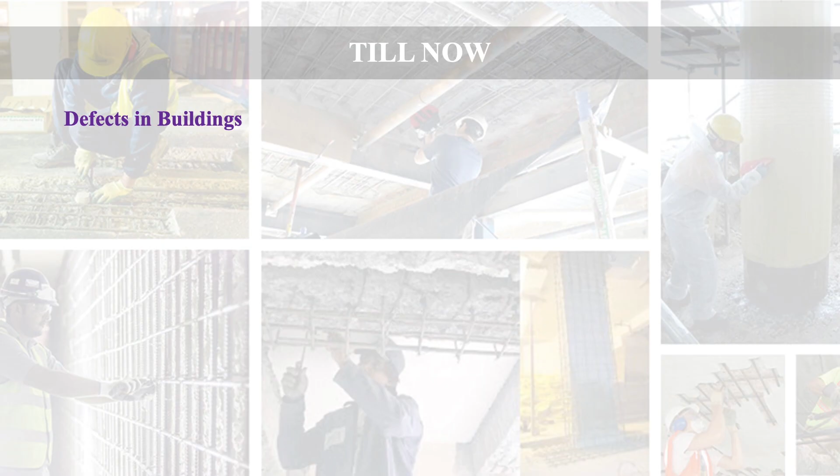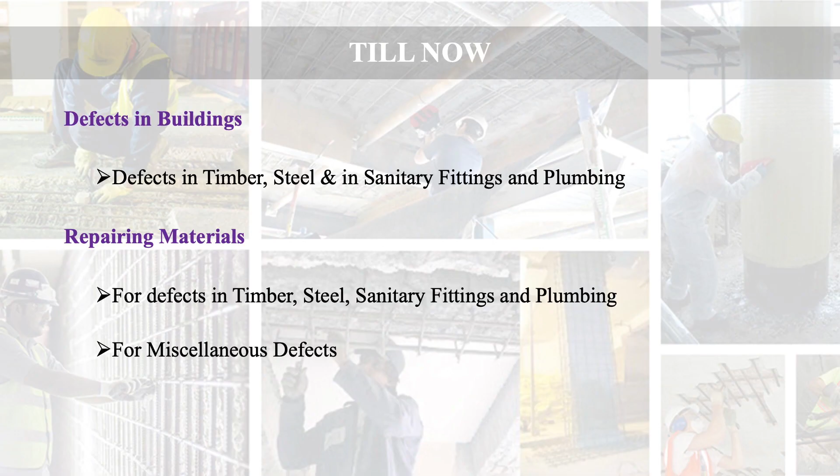Today we are going to discuss about the cracks in concrete beams. As you remember, we have discussed till now about defects in buildings, in which we discussed about defects in timber, in steel, and also defects in sanitary fittings and plumbing. Then later on we moved to repairing materials for defects in timber, for defects in steel, for defects in sanitary fittings and plumbing, and repairing materials for miscellaneous defects. Then we discussed about repair and preventive maintenance techniques, in which we discussed about repairing of floors, then strengthening of stone and masonry structures, and lastly we discussed about water and damp proofing.

Now we are moving to a new topic, which is strengthening of cracked beams. Today we will be discussing about the causes for defects in beam and structures, particularly concrete structures, the types of cracks in concrete beams, and repair of concrete structures.

Objectives of this lecture are as follows: at the end of this module you should be able to explain the factors contributing to the failure of beams, and also you should be able to describe various types of failure.

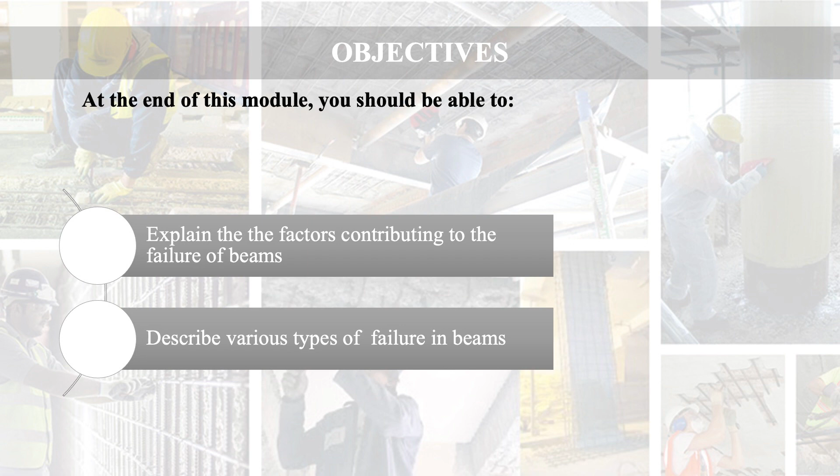Now let's begin with the essential conditions for continued serviceability of a structure. That if a building has to be serviceable, what should be its characteristics? Means if a building has to be serviceable through its life, then what should be the characteristics or conditions there?

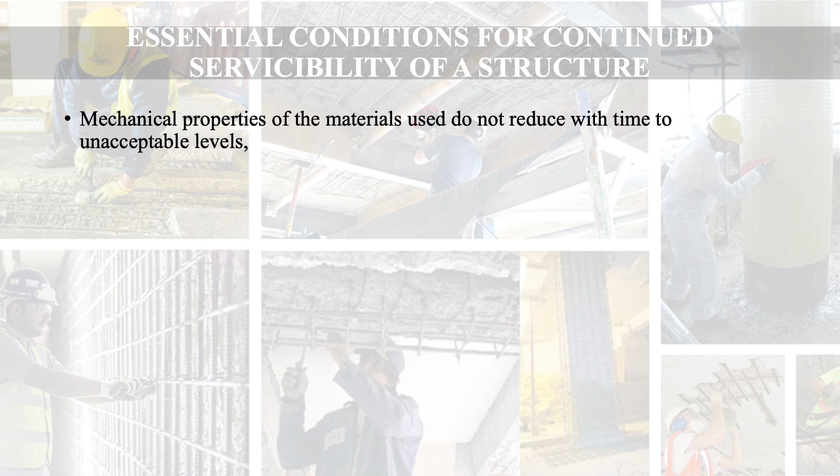First, the mechanical properties of the materials used do not reduce with time to unacceptable levels. We know that there is certainly a reduction in the properties of the material, but that should be within limits. So it should not be up to an unacceptable level.

Second, there is no reduction in size of a structural member, either by erosion of concrete, by spalling, or corrosion. Due to erosion, spalling, or corrosion, the size of the structural member should not reduce; it should remain the same if the structure has to be serviceable.

Next, there is no significant loss of section of reinforcing steel in concrete. Due to corrosion, the section of the steel should not reduce, meaning the size of the reinforcing steel should not reduce.

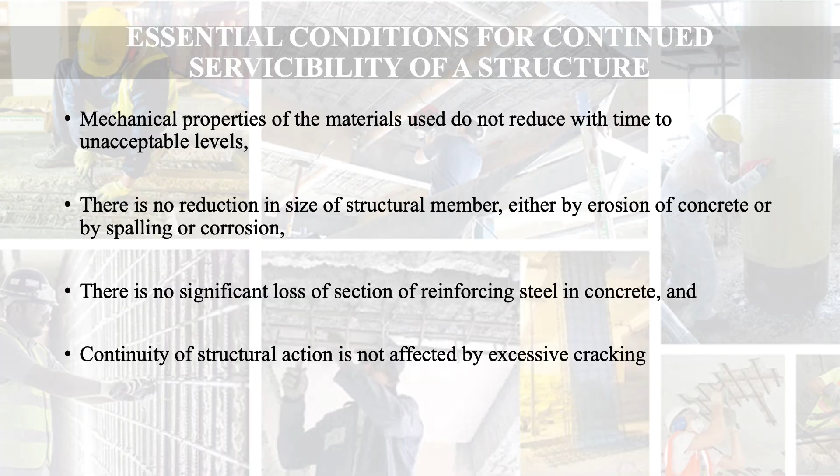Next, continuity of structural action is not affected by excessive cracking. That the main structural action should not be affected. So these are the four conditions for continued serviceability of a structure.

Now we move to causes for defects in structures in general and beams in particular. First is structural deficiency resulting from errors in design, loading criteria, unexpected overloadings, etc. This may be the cause for defect.

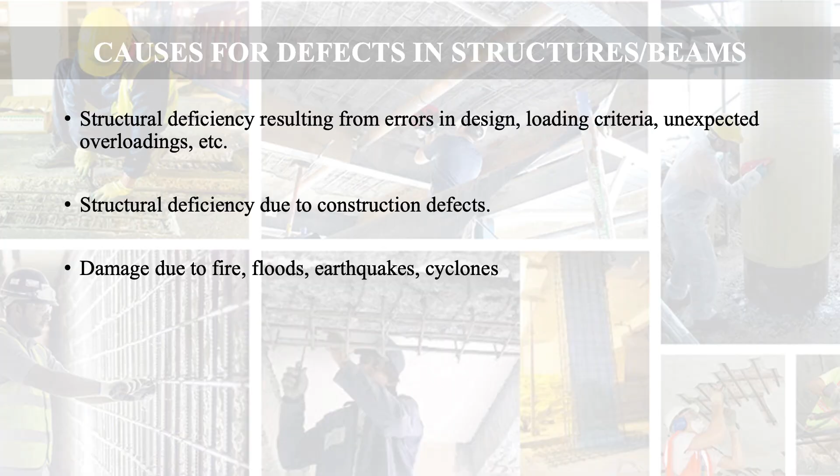Next is structural deficiency due to construction defects, that due to faulty construction there may be deficiency in the structure. Then damage due to fire, floods, earthquake, cyclones. So due to these natural phenomena or some accidents, damage will be there in the structure.

Then damage due to chemical attack. It may be due to environmental conditions, industrial activities, or accident. Then damage due to marine environment, because marine environment is very adverse to the structure—it affects concrete and steel both.

Damage due to abrasion of granular materials—due to abrasion of the granular materials, there will be damage to the structure. Then movement of concrete due to physical characteristics—the changes in the characteristics of the concrete due to various factors will be taken care of here, and it may cause defects in the structures.

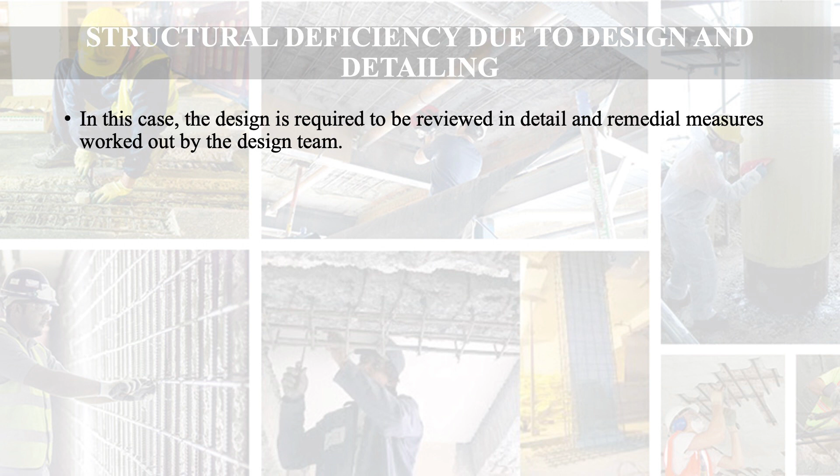Now let's move to structural deficiency due to design and detailing. In this case, the design is required to be reviewed in detail and remedial measures worked out by the design team. If there is some deficiency due to design and detailing, then first it has to be reviewed. Whatever drawbacks or problems are there in the design have to be identified, and the structural members have to be redesigned to the correct size so that they can take up the loads or transfer the loads properly.

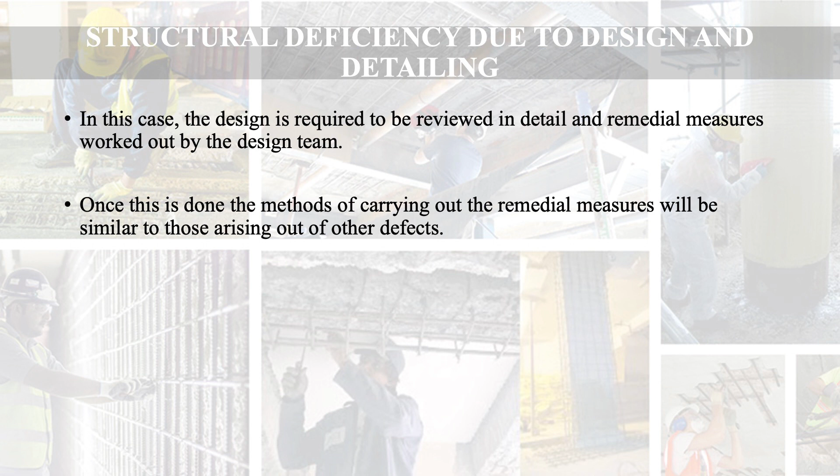Once this is done, the methods of carrying out the remedial measures will be similar to those arising out of other defects. Whatever way you will rectify the problems of the structure in other cases, in other defects, this problem will be handled similarly.

Then structural deficiency due to construction defects—there may be defects due to faulty construction. Defective construction methods form the largest segment of source of distress to the structures. Such defects can be broadly subdivided as follows.

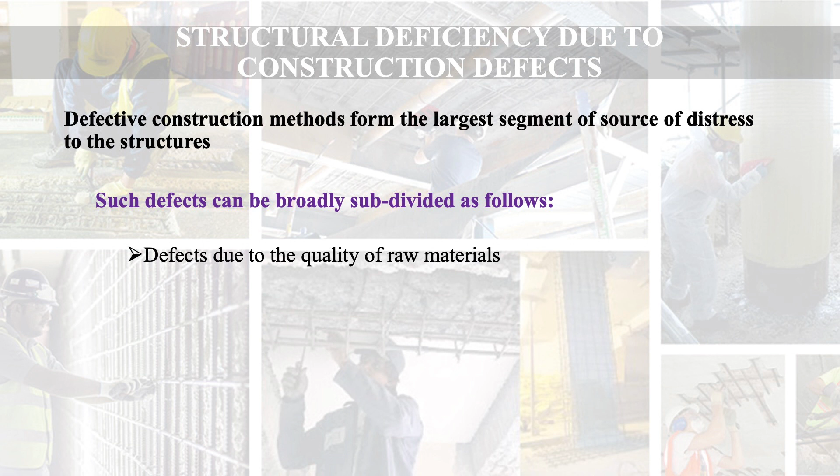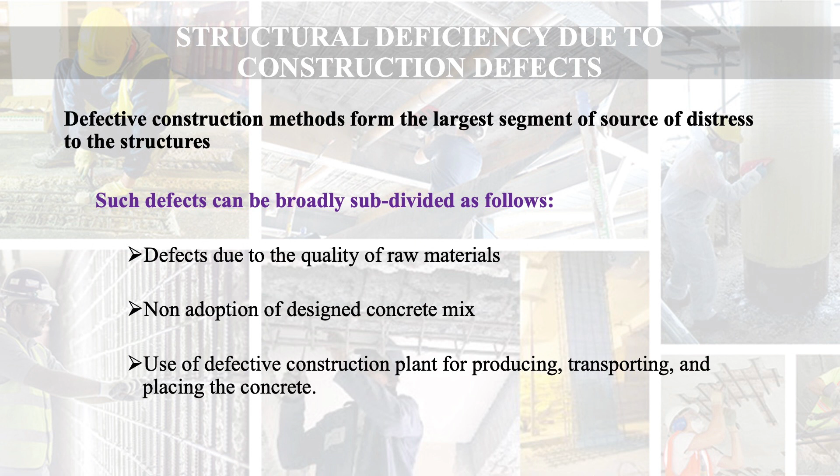These are defects due to the quality of raw materials first. Second is non-adoption of designed concrete mix, meaning we are using the concrete mix which is not designed. Then use of defective construction plant for producing, transporting and placing the concrete. There may be problems during producing the concrete, during transportation of the concrete, and also during the placing of concrete.

If mistakes are made there, defects are bound to come in the structure. Then very important thing, defective workmanship - if tradesmen are not working properly, it will certainly result in defective construction. Then inadequate quality detailing - detailing that is not proper to achieve quality construction will cause structural deficiency and defects in the structure.

So first we have to deal with the materials - how to choose the material. Choice of materials is very important. As far as concrete is concerned, the ingredients are cement, aggregate, and water. So we have to be very careful while selecting the materials.

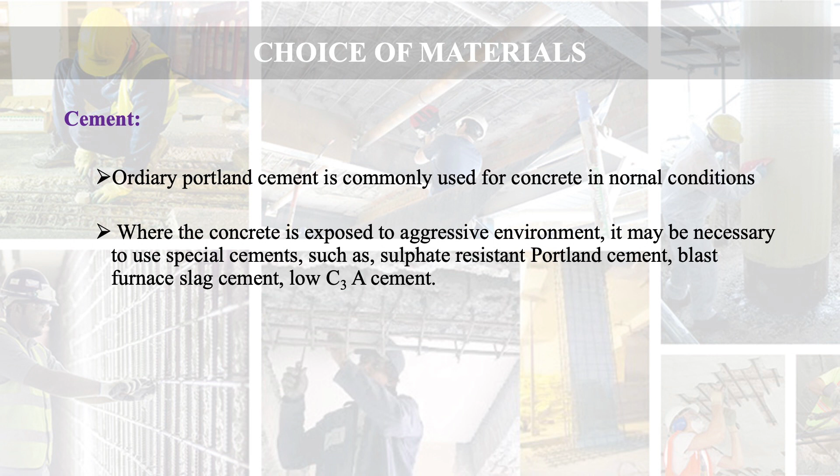Let us begin with cement. Ordinary Portland cement is commonly used for concrete in normal conditions. Where concrete is exposed to aggressive environment, it may be necessary to use special cements depending upon the situation, such as sulfate resistant Portland cement, blast furnace slag cement, low C3A cement, low heat cement. Depending upon the situation, like in oil wells, we have to use oil well cement - the particular type of cement which fits the situation.

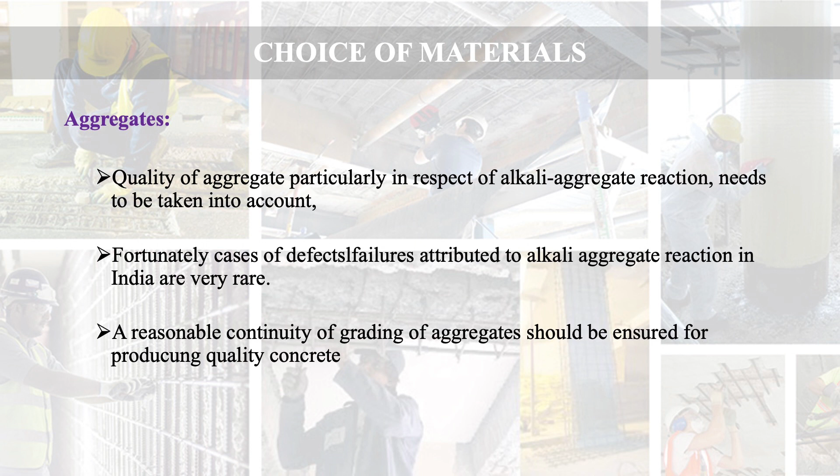The next is aggregate. Quality of aggregate, particularly in respect of alkali aggregate reaction, needs to be taken into account. Fortunately, cases of defects and failures attributed to alkali aggregate reactions are very rare. A reasonable continuity of grading of aggregates should be ensured for producing quality concrete.

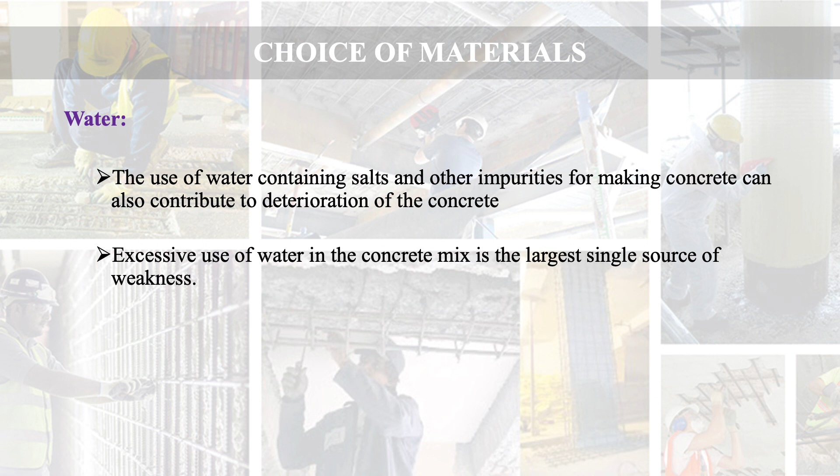Now next is water. We all have read that water should be of the quality that if we can drink it, it is fit for producing concrete. The use of water containing salts and other impurities for making concrete can also contribute to deterioration of the concrete. Excessive use of water in the concrete mix is the largest single source of weakness.

Because excessive water is there, many problems will be created, like bleeding of concrete. On evaporation, pores will be created in the concrete, which will cause many defects in the concrete. Then there is measurement of ingredients.

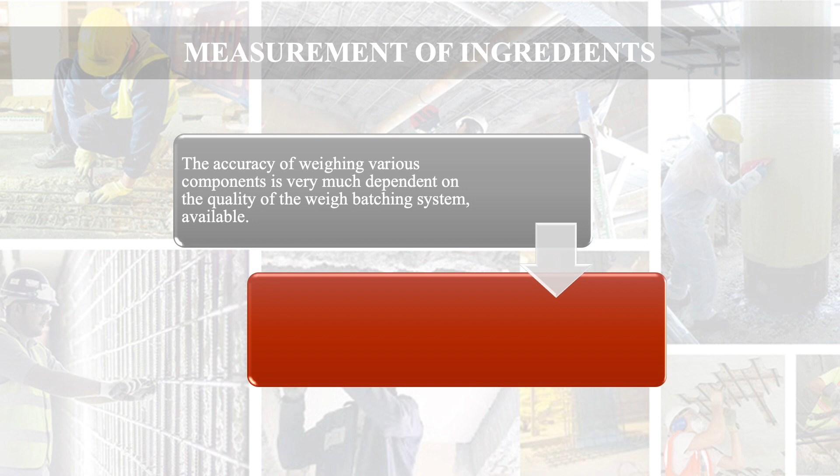This is also very important as far as the quality of concrete is concerned. The accuracy of weighing various components is very much dependent on the quality of the weigh batching system available. Spring-loaded dials of weigh batchers contribute towards excessive variability in quality of weigh batched concrete. If there is variation in the performance of the weigh batchers, the quality of concrete will vary. If you are not measuring the exact amount of material required, it is certainly going to affect the quality of concrete.

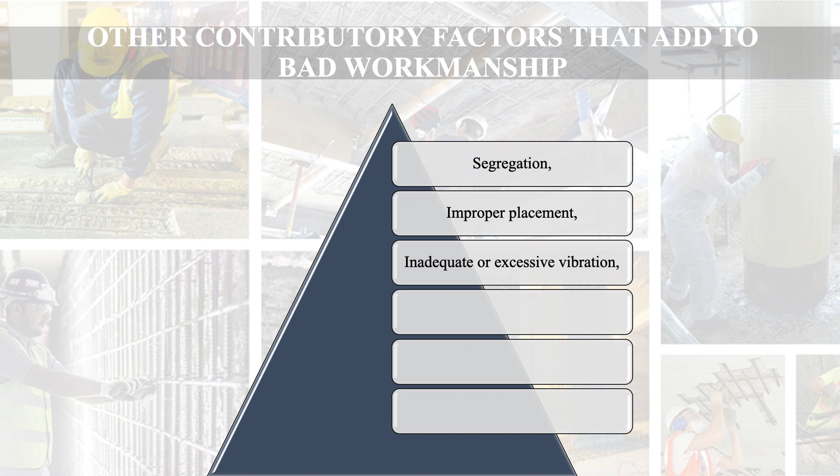Let's see other contributing factors that add to bad workmanship: segregation, improper placement, inadequate or excessive vibration, leakage of mortar through shuttering joints, inadequate concrete cover, and insufficient curing. These are some other factors that may add to bad workmanship.

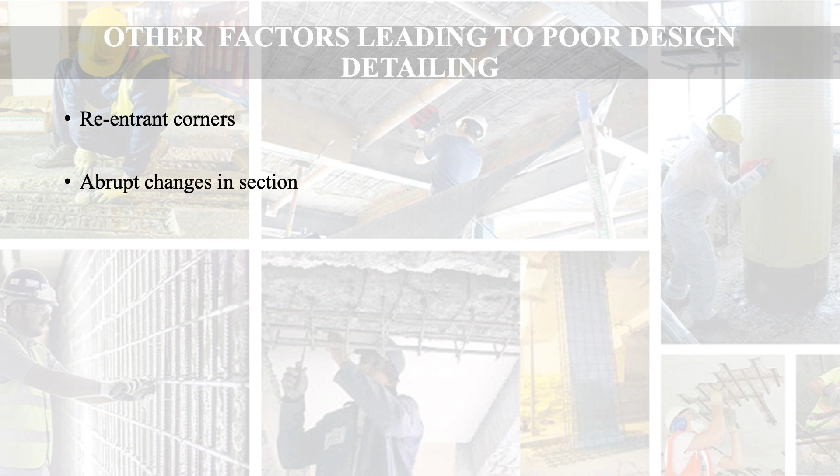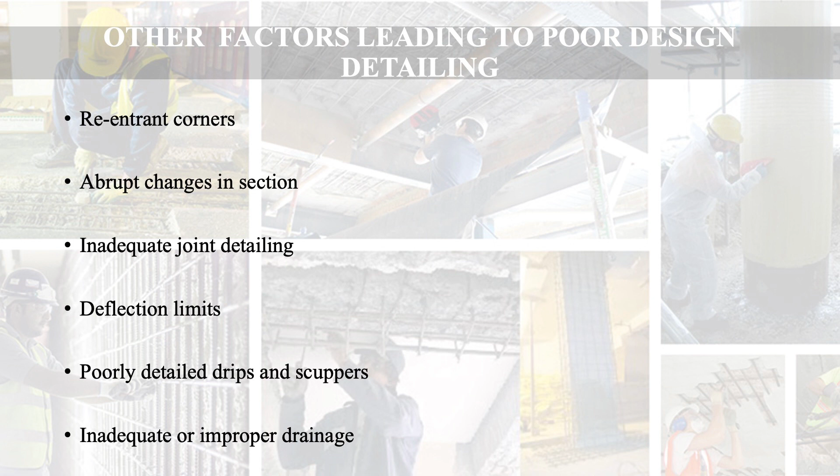Now let's see other factors leading to poor design detailing: re-entrant corners, abrupt changes in section, inadequate joint detailing, deflection limits - if crossed, then there is a problem - poorly detailed drips and scuppers, inadequate or improper drainage, and poor detailing of expansion joints. These are some of the factors which may lead to poor design detailing.

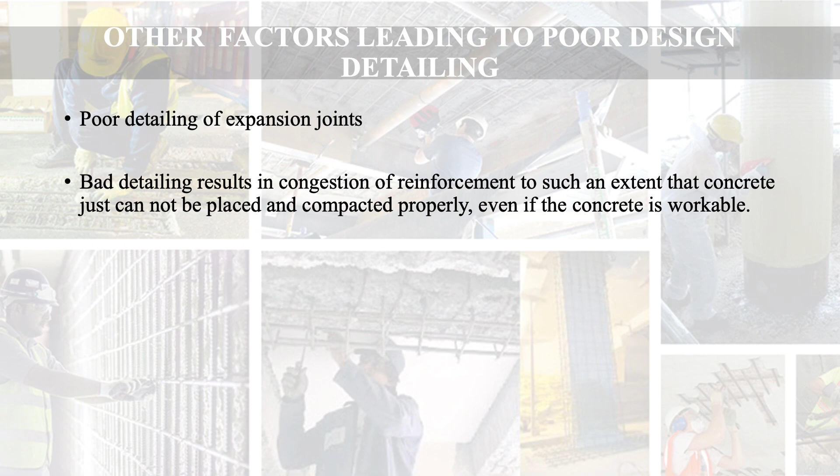Bad detailing results in congestion of reinforcement to such an extent that concrete just cannot be placed and compacted properly, even if the concrete is workable. So we have to be careful that while placing and detailing the reinforcement, it should not result in congestion of the reinforcement.

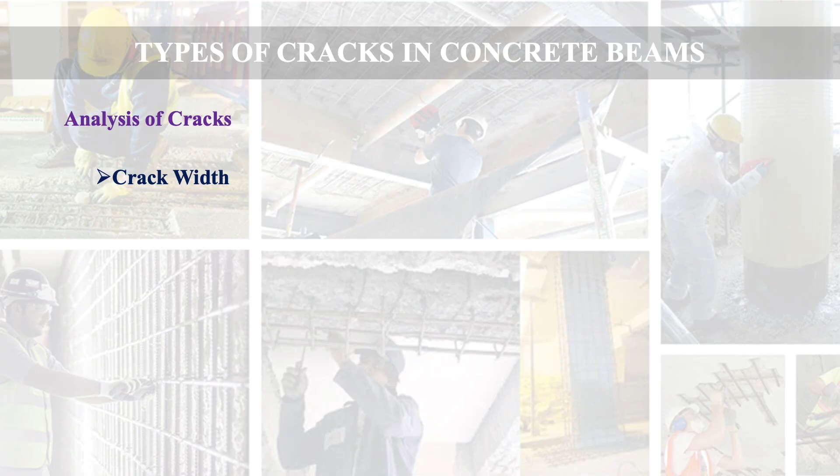Now we move to type of cracks in concrete beams. First we begin with analysis of cracks, and in this analysis crack width is a very important factor. The tensile stresses, though small, can cause cracks, especially when the span is 4 to 5 meters long. These cracks are harmless for serviceability, durability and safety of the structures as long as the crack width remains under a specified amount, say 0.2 to 0.4 mm, depending upon environmental conditions.

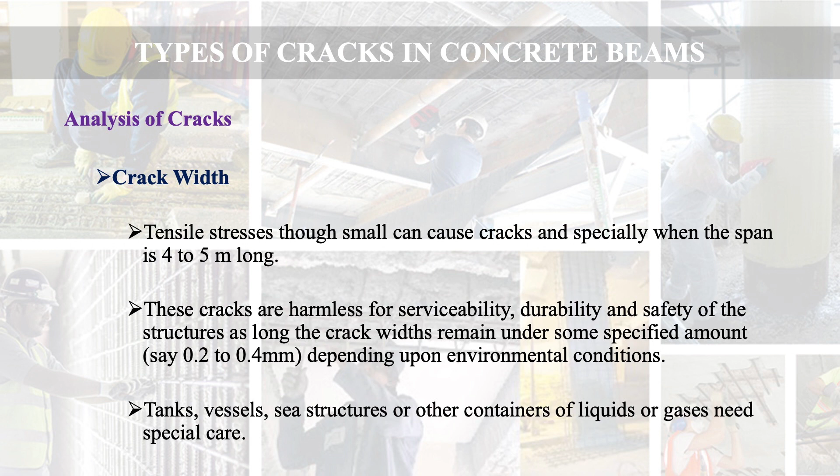This factor is very important - if environmental conditions are different, then small crack width may be very detrimental. Tanks, vessels, sea structures or other containers of liquids or gases need special care because there should not be any leakage due to cracks.

Cracks up to a width of 0.4 mm at the surface do not increase corrosion if the concrete cover is at least 25 mm for bars smaller than 20 mm. Wider cracks indicate, in most cases, poor detailing of reinforcement and improper bond between reinforcement and concrete. Hence, crack width control is important in addition to appearance and corrosion protection.

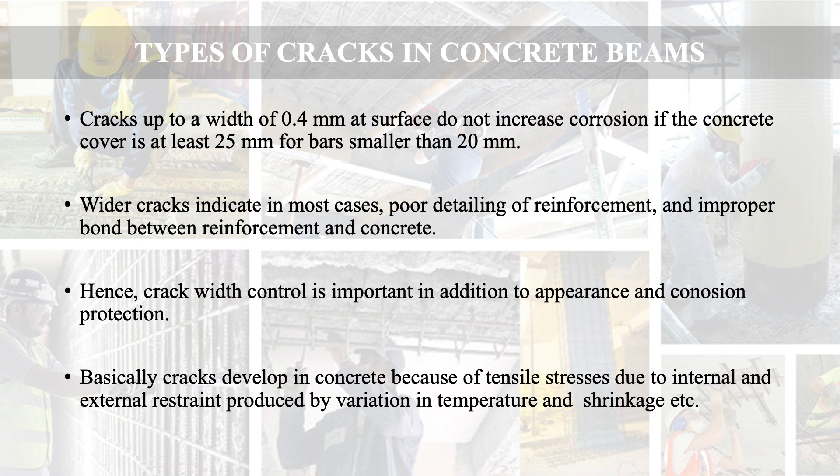Basically, cracks develop in concrete because of tensile stresses due to internal and external restraint produced by variation in temperature and shrinkage, etc. At early age, say 3 days of the structure, the tensile strength of concrete is still very low, and the tensile stresses due to temperature differentials caused by heat of hydration easily rise above the strength of the concrete and cause cracks.

Micro cracks between coarse aggregate and mortar are formed at early age, which reduces the final tensile strength of concrete.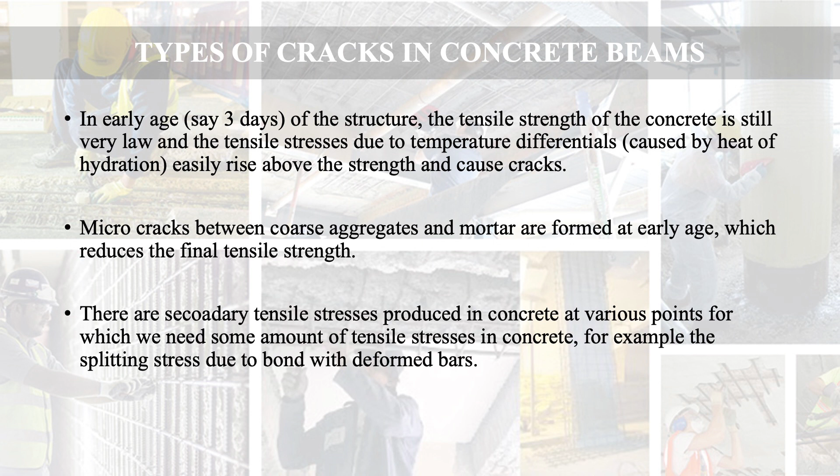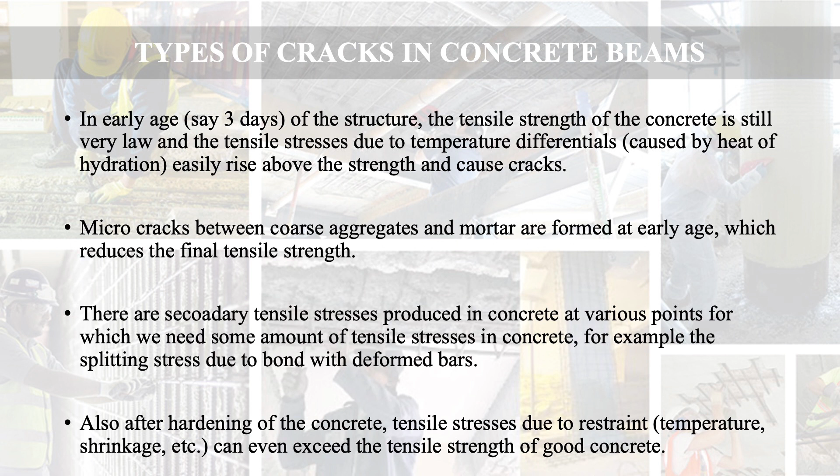There are secondary tensile stresses produced in concrete at various points, for example the splitting stress due to bond with deformed bars. Also, after hardening of the concrete, tensile stresses due to restraint, that is because of temperature and shrinkage etc., can even exceed the tensile strength of good concrete.

Cracks cannot be prevented by reinforcement. Proper reinforcement can only prevent the opening of cracks and can enforce small crack widths, meaning it will prevent the opening of cracks and enforce that the width of crack is small.

A crack width at surface of 0.3 mm may correspond to 0.1 to 0.05 mm width at the bar surface. So the crack having width 0.3 mm will be having a smaller crack width at the reinforcing bar level, depending upon cover and the bar size. Hence, the effect on corrosion is small or negligible.

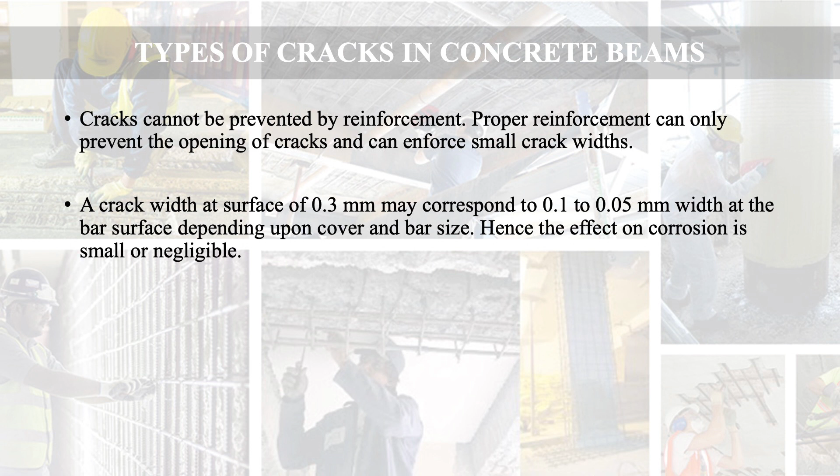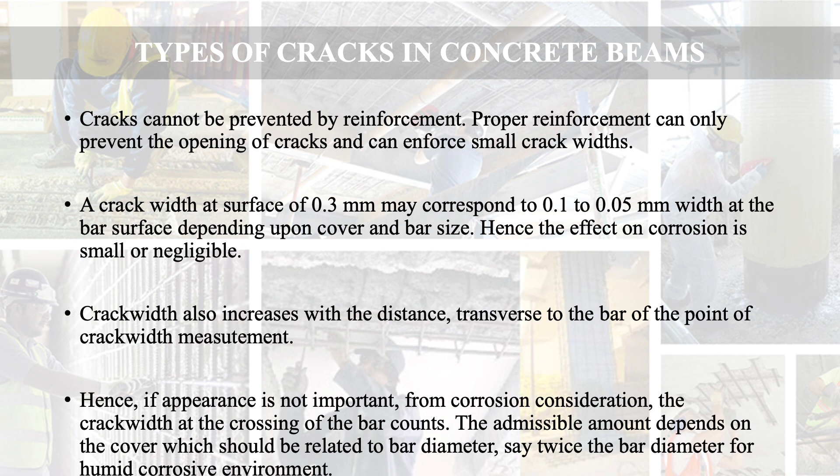Crack width also increases with the distance transverse to the bar from the point of crack width measurement. Hence, if appearance is not important, from corrosion consideration, the crack width at the crossing of the bar counts. The admissible amount depends on the cover, which should be related to the bar diameter, say twice the bar diameter for humid corrosive environment, and should be protected by small transverse reinforcement.

The crack width theories developed are for flexural cases, may be combined with axial forces, and where the crack is perpendicular to the reinforcing bar, that is transverse cracks. However, cracks just above the reinforcing bars and parallel to the bar, that is longitudinal cracks, are more dangerous because of loss of bond and very high susceptibility of corrosion of reinforcement.

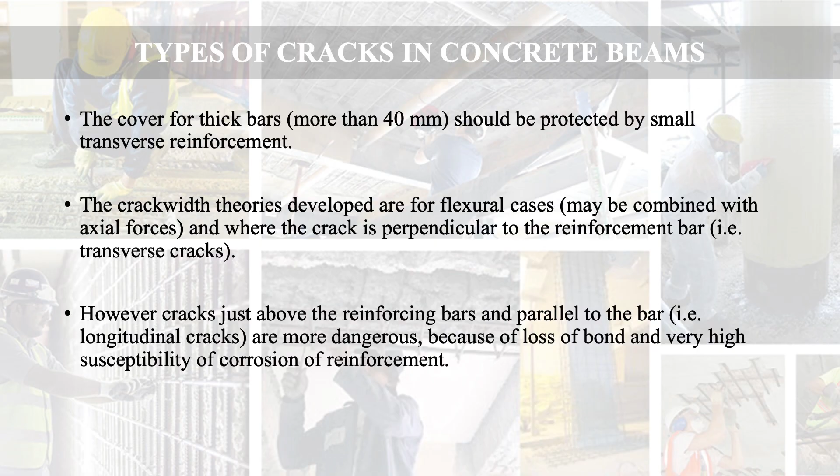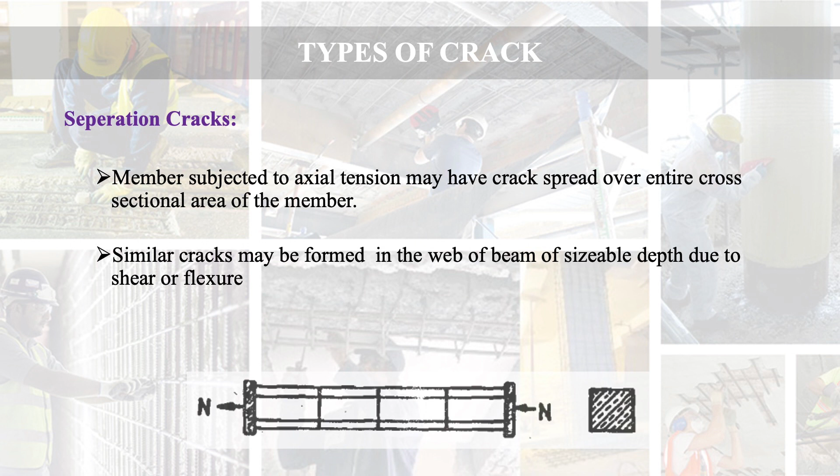Now let's see different types of cracks. First is separation crack. Members subjected to axial tension may have cracks spread over the entire cross-sectional area of the member. Similar cracks may be formed in the web of a beam of sizable depth due to shear or flexure. Here you see the separation crack.

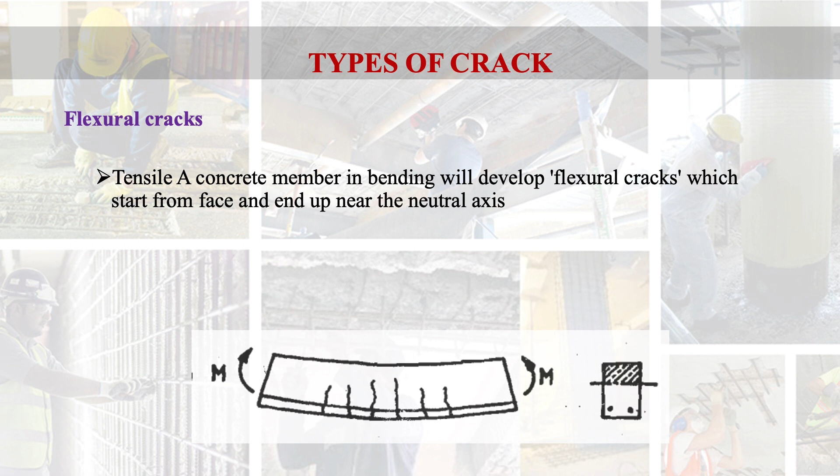Next is flexural crack. A concrete member in bending will develop flexural cracks which start from the tensile face and end up near the neutral axis. You can see the flexural cracks in the beam shown here, starting from the bottom, that is the tensile face, and ending up near the neutral axis.

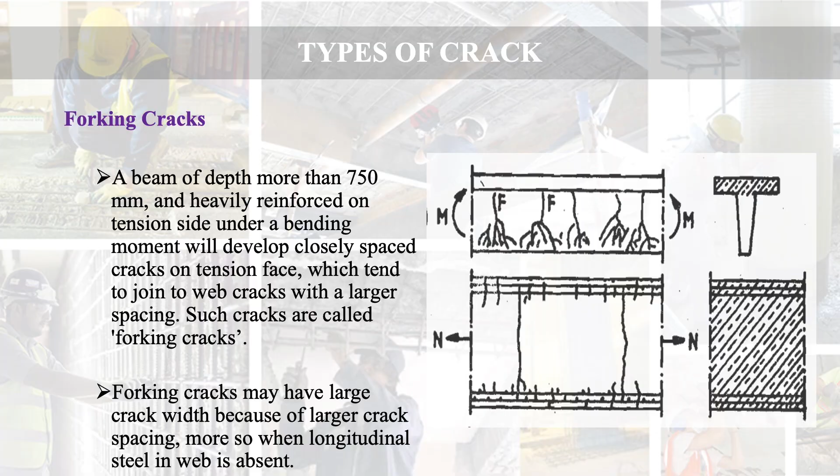Next is forking cracks. A beam of depth more than 750 mm and heavily reinforced on tension side under a bending moment will develop closely spaced cracks on the tension face, which tend to join to web cracks with larger spacing. Such cracks are called forking cracks. Forking cracks may have large crack width because of larger crack spacing, more so when longitudinal steel in the web is absent. Here you see flexural cracks.

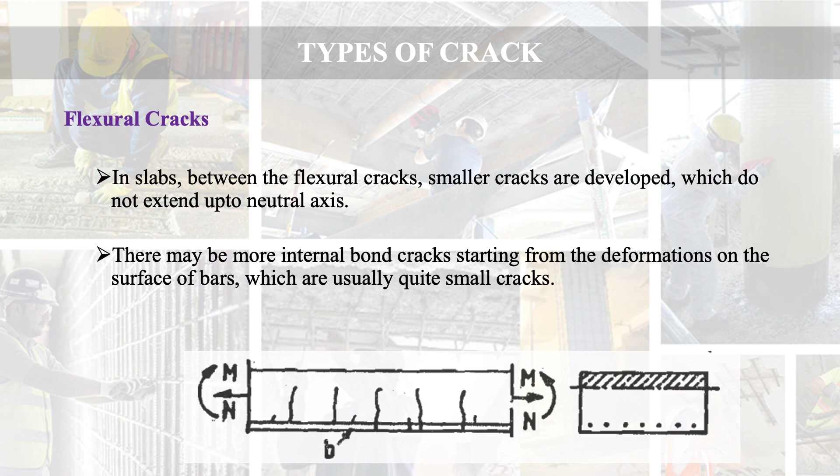There are two situations, one under bending and second under tension. In slabs, between the flexural cracks, smaller cracks are developed which do not extend up to the neutral axis. There may be more internal bond cracks starting from the deformations on the surface of bars, which are usually quite small cracks. So here you see the cracks in the slab.

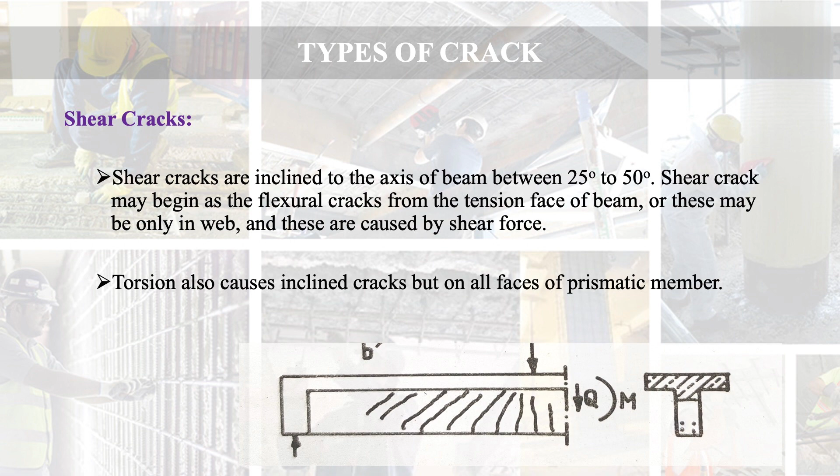Next is shear crack. Shear cracks are inclined to the axis of the beam between 25 degree to 50 degree. Shear crack may begin as flexural cracks from the tension face of the beam, or these may be only in the web and caused by shear force. Torsion also causes inclined cracks, but on all faces of the prismatic member. This is the difference between cracks caused by torsion and cracks caused by shear. So here you see the shear cracks.

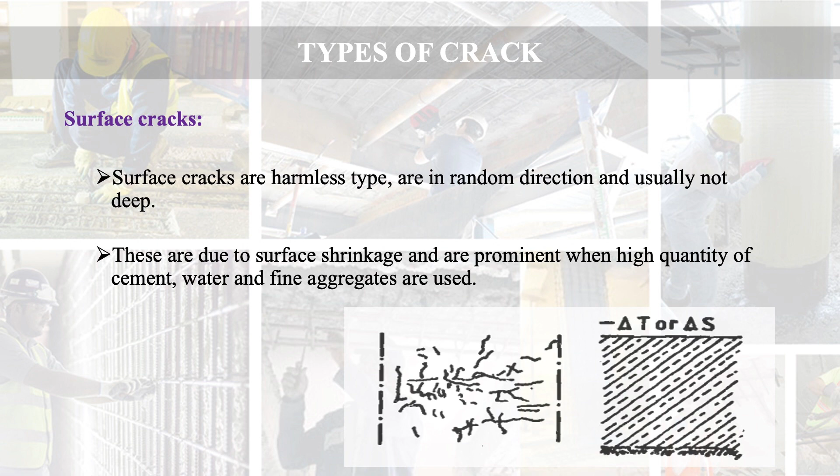Next is surface crack. Surface cracks are harmless type. These are in random direction and usually not deep. These are due to surface shrinkage and are prominent when high quantity of cement, water and fine aggregates are used. Here you see the surface cracks in the structure.

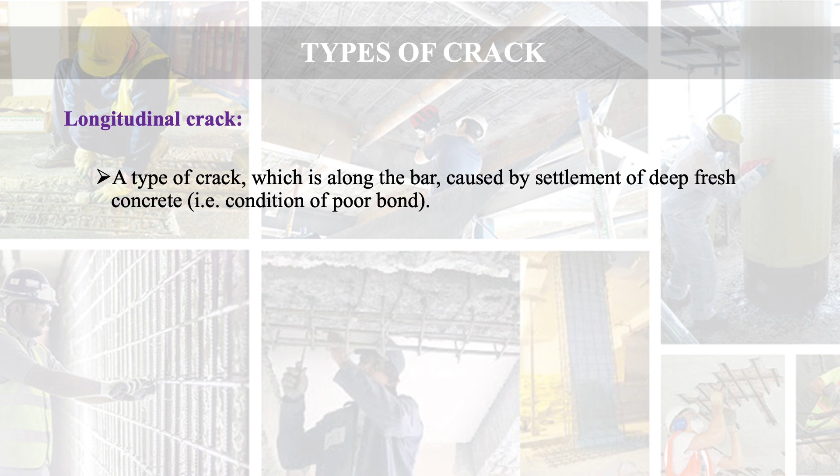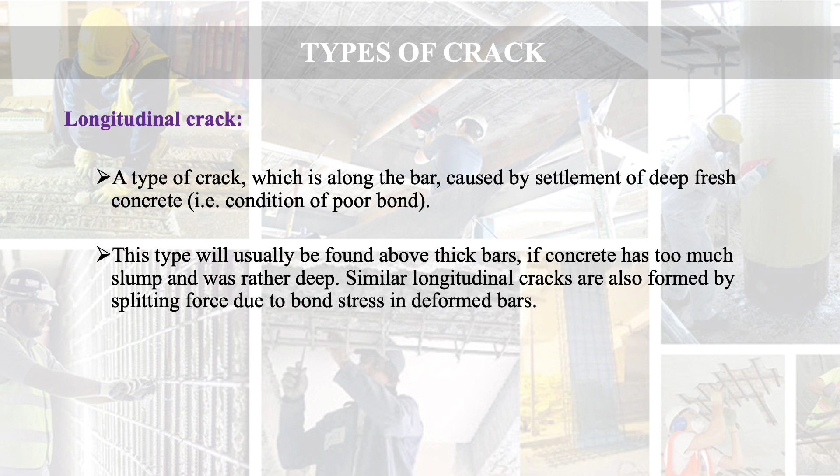Next is longitudinal crack. Longitudinal cracks are a dangerous type of crack, along the bar, caused by settlement of deep fresh concrete, and are because of poor bond. This type is usually found above thick bars if the concrete has too much slump and was rather deep. Similar longitudinal cracks are also formed by splitting force due to bond stress in deformed bars.

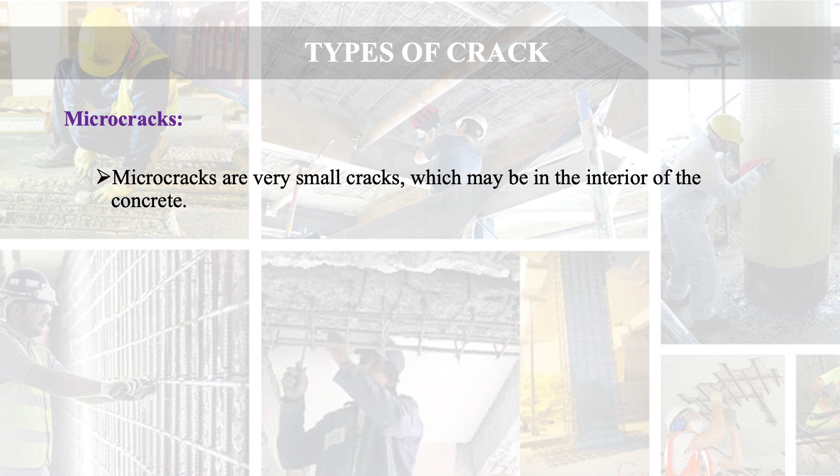Next is micro cracks. Micro cracks are very small cracks, as is clear from the name. These may be in the interior of the concrete and have no relevance to crack width limitation.

So in this lecture we discussed the causes of defects in structures in general and in beams in particular, in which we covered structural deficiency due to design and detailing, structural deficiency due to construction defects, analysis of cracks, and finally the types of cracks.